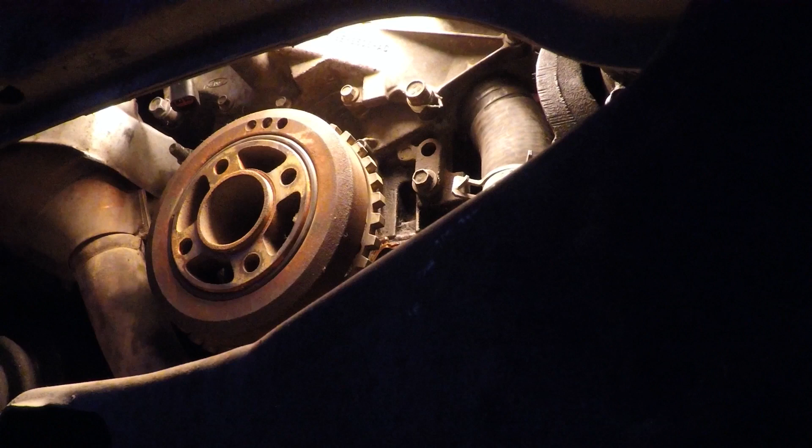Okay, so I put some of the thread locker on a bolt, and we'll put her back in. That is good for now. Now I gotta torque it down. But before we do that, I'm going to go ahead and get that crank position sensor.

The guy goes back in here. Okay, so that one sort of fits inside.

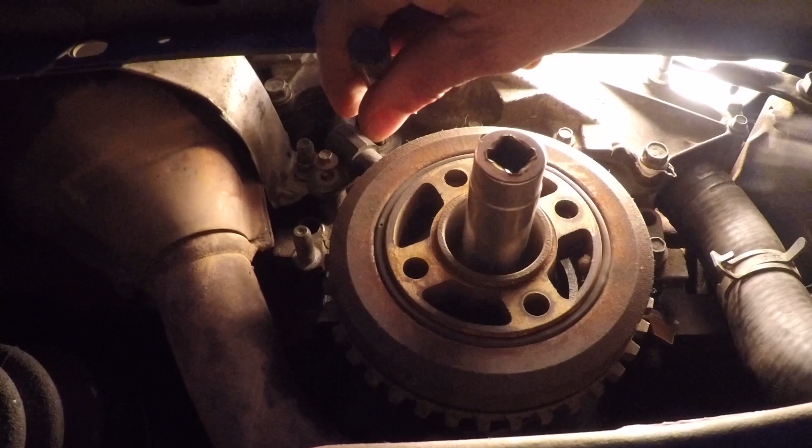Hammer chisel there, go ahead and take your little teeny hammer. Let's take this out of here.

Okay, something I should have done to the other one, but I didn't, was put some lube on it. Ow, come on you. Ooh, I had to put on a glove.

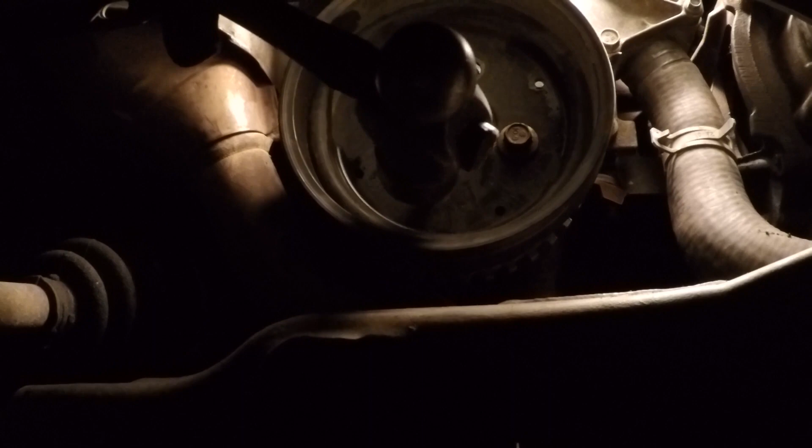Whew, it's a tough bolt. Yeah.

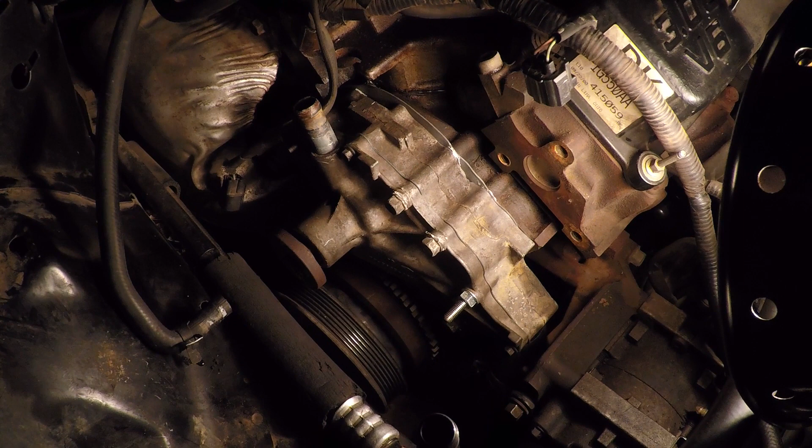Alright, well, we're back up here because this is where there's things left to do. Like plug in the sensor there, the crank position sensor. And we've got it running on the small stud there.

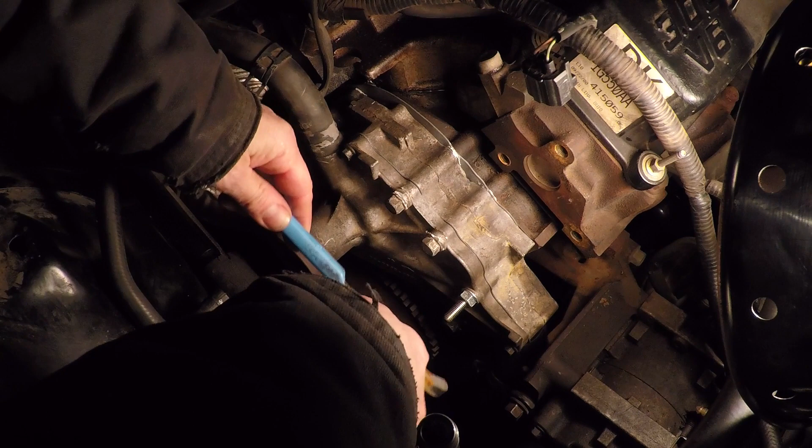I guess we could probably get this guy back in here. Gonna need pliers. And we can go ahead and get that one's in place.

I hope that's where it wants to go. I'm really not sure exactly. I think that's about right. Well, that's where it is now. I guess we ought to put it on a pulley.

Thread locker. Put some of that on there. And it comes with it, so you gotta use it right.

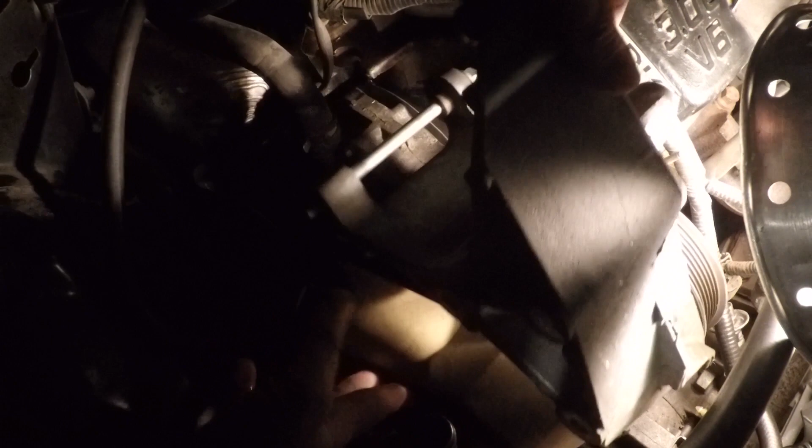Looks like I think I'm ready for the power steering assembly. Alrighty.

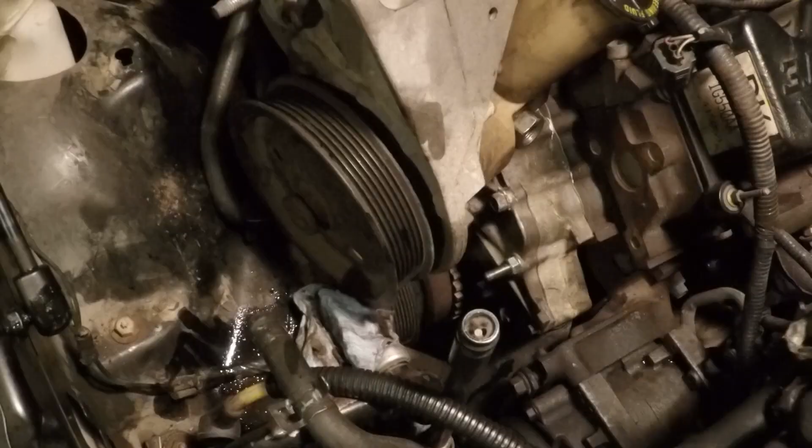Okay, that's good enough for now. Yep, that's my 18 millimeter, I believe. Because you gotta have an 18 millimeter open-end wrench for this.

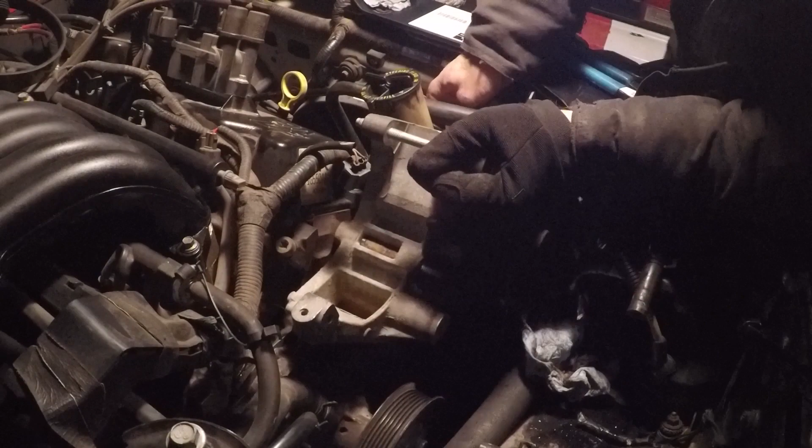Ay, why does this one have to be so difficult? I don't know if you can see, but over here. This off. Oh, I suppose I can put back there. And I can just.

That's good enough. Slide him back in there. Why that gotta be so difficult?

Yeah, that was a little bit messy and difficult, not sure why. Still don't even have it on. A little bit of used transmission fluid will help guide it on its way.

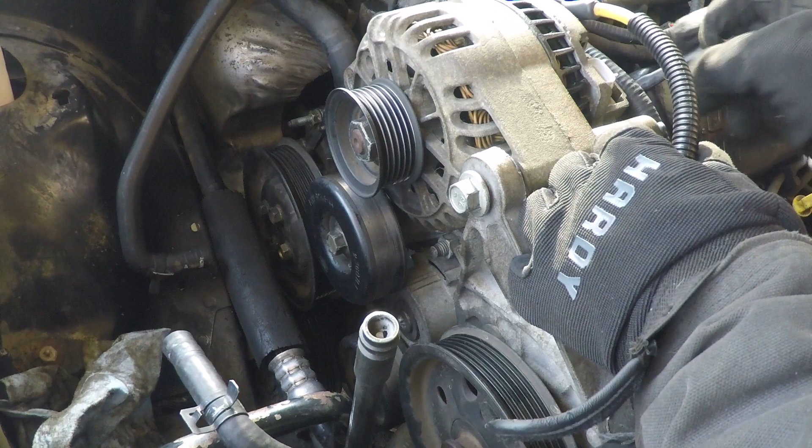Alrighty, so the fun begins today with undoing some of the stuff we did last time because I made mistakes with the camera. Oopers. So we'll have to undo some things. So undo those.

Tap this guy back a little bit, make it easy to put the part back in. Oh yeah, that was torqued down good. Maybe we can have some fun here. I gotta get this guy back in here, good, pry it off. There. Getting it.

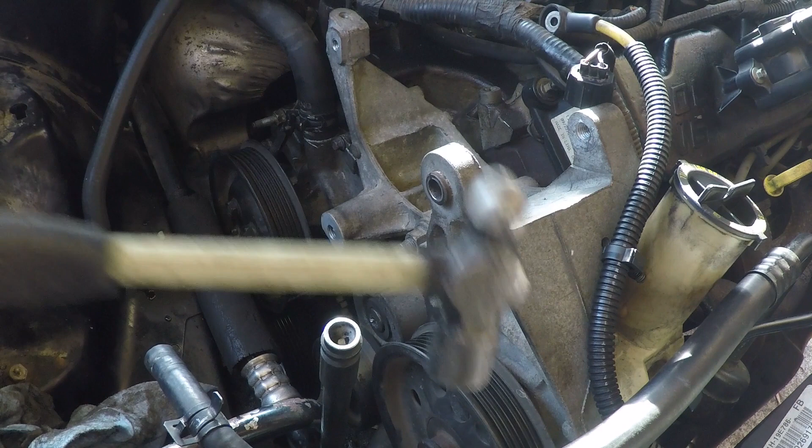Probably should set my trusty torque wrench. I got the new lightweight model torque wrench. Even though it's small, it does go up to the 40 pounds required for this bolt here. I think it's 40, I don't really know, but it should be just about 40.

There we go, that one's set. Now I gotta put this one on. Okay, I gotta start over with this pulley here. Put this guy under here, hold it in place. Okay.

Slide this guy in, and notice how easy it is to put this in place because I tapped this sleeve back just a little bit. There we go.

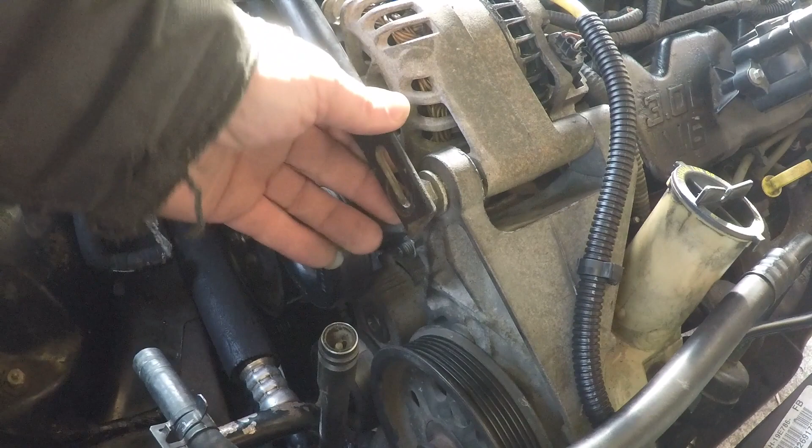Well, now I realize that bracket bolt's going to have to come back out for this. Get my pry bar. Might have to get in here. Get that bolt. Yeah.

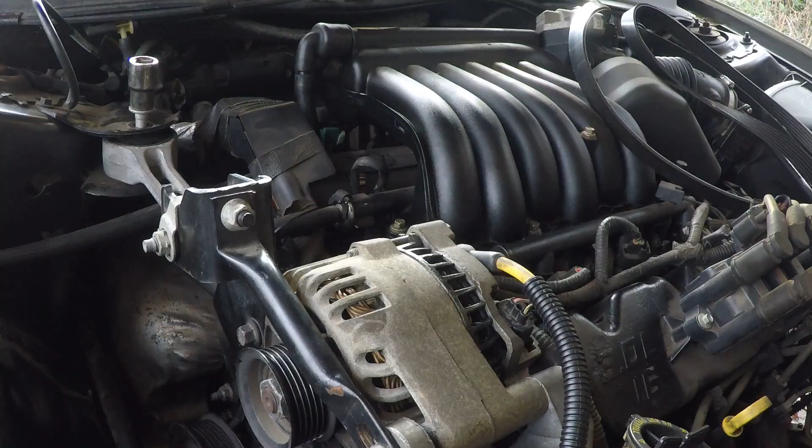Okay, so that's the last bolt. I'd loosen this one up. Now it's time to put that one in. So there we go.

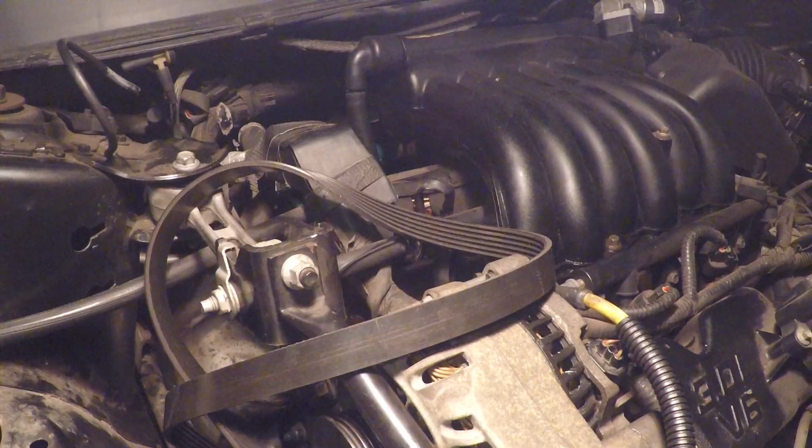Alrighty, so that's basically all we got to do. Let me put that right there so I can see it, because...

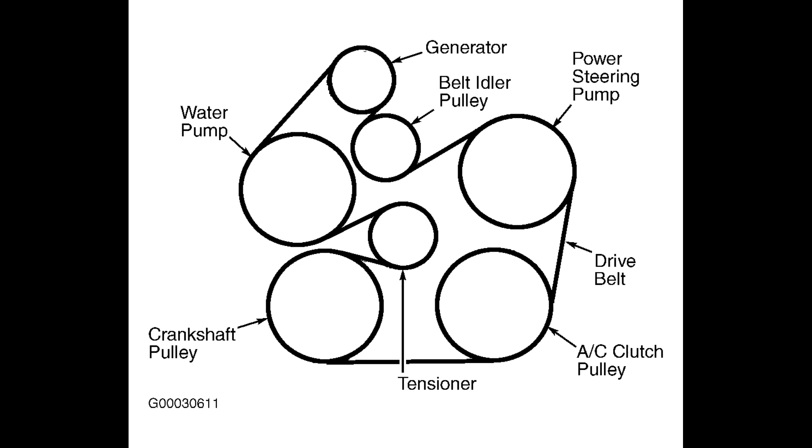There really is no good place to put the camera to do this. And I suppose there's no point. I suppose I could put the camera pointing at me so you can see me struggle. Are you a sadistic viewer? Do you want to watch me strain? Alright.

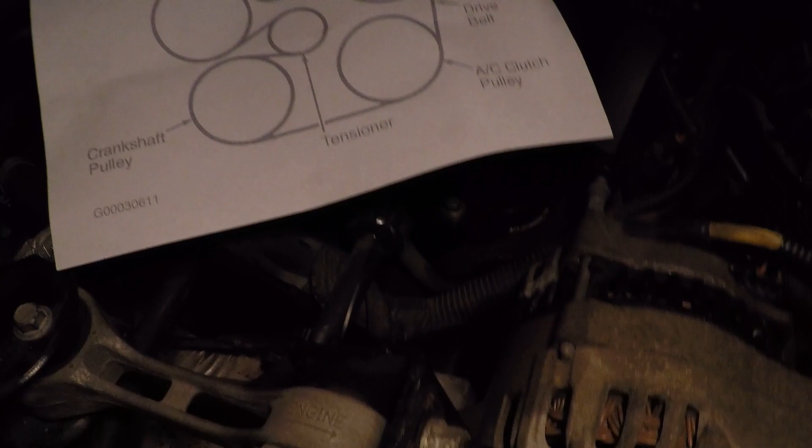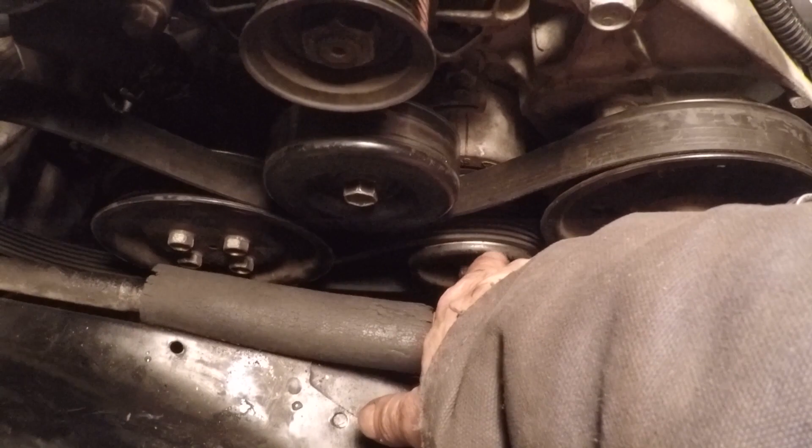Okay, so guess what I can do is show you how I've got the belt all sort of set up, the slack here, and it is routed down and around, and it's actually routed just like that along the bottom, up on the AC pulley on the crankshaft, and then from the crankshaft it goes along the tensioner and back under the water pump, and then under the... what's that pulley... and around the back of the power steering pump here.

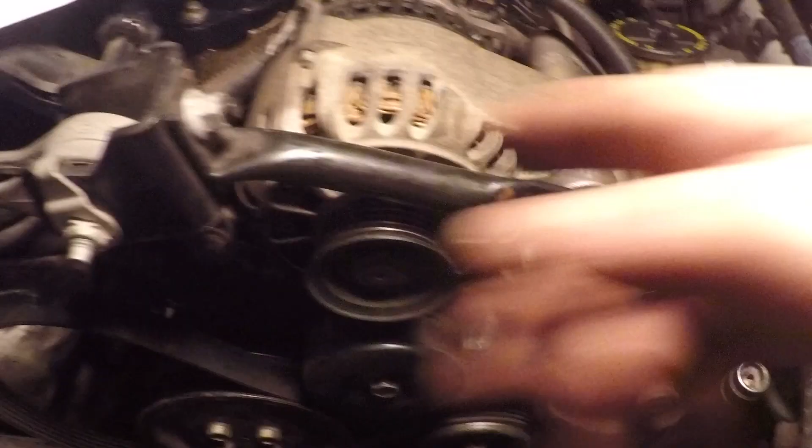So now I just got to get a 15mm in here and bring it this way. I believe that way will take the tension off. And while I bring that wrench that way, bring this up this way. Easy peasy, right?

Yeah, it does go this way. It seems to go the opposite direction.

Seems good, good all around. Looks like we're good. Alright, so now that the belt is under tension, I can actually finish up the torque on those bolts.

Alrighty, I think it's actually pretty much done. All I gotta do is put that tank back in. Wow, hard to believe, huh? Finally back together. Yeah, where's my tank?

Oops, what was that? What was that? Oh, there's the bolt I lost. Are you kidding me?

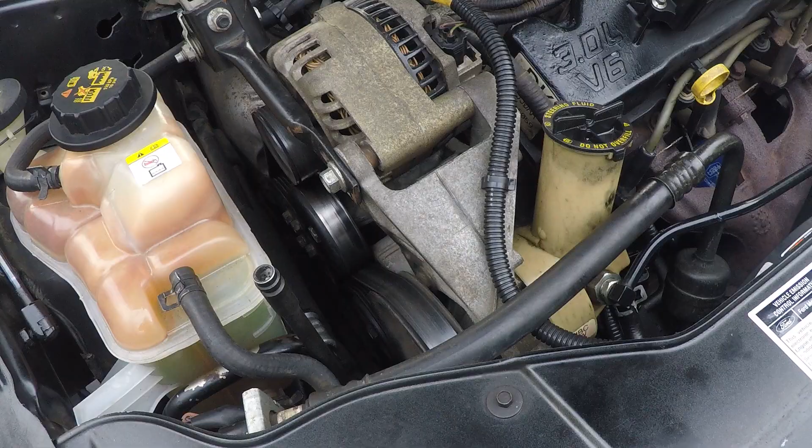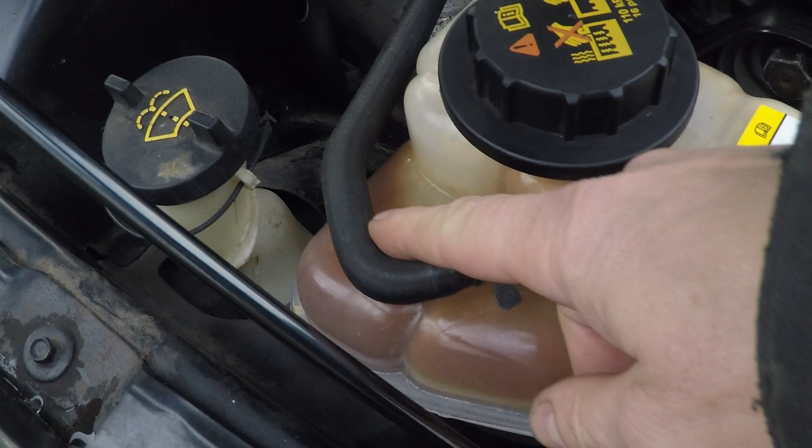Alrighty, well, I had some camera troubles, but I assure you I did get these hoses. And one down here, and this bolt in, and there's another one that goes over here, but I don't know where that is. But you know, it'll probably be okay. Don't tell anyone.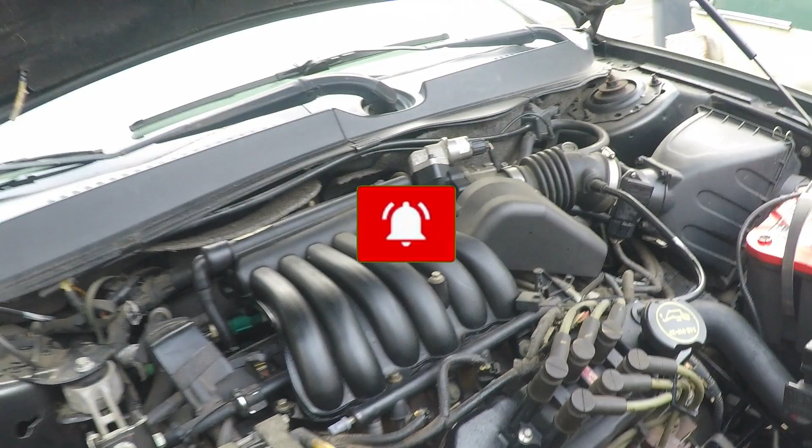So after I did that, I went ahead and opened this up, and I ran a hose in there, and I flushed all the fluids out of the motor. I ran the motor for a while, and I just ran water in it until it flushed out all the colored brown orangey kind of stuff like this here.

I don't know if you can see, it's sort of stained. This is actually a new tank I got like a year ago, when the other one deteriorated and leaked all underneath it. That's what this residue here is from, from when the coolant leaked under it, on the old tank.

So this tank is only a year old, but the rust that was in the coolant at the time pretty well stained the tank. So I probably should have flushed the system then. I didn't. I probably should have flushed the system 10 years ago and didn't.

At any rate, so this time, since I had already drained most of the fluid out, and what didn't leak out while it was leaking in the timing cover, I figured I'd just flush it all out and get only clean stuff in there.

And that meant just opening the valve down here that you have to open up toward the beginning when you're draining and cleaning fluids, and running the motor, having the hose run at a low pressure to keep the tank full while it flushes out the system. Then I stopped the water and left the engine running until it pumped out all the fluids it was going to pump out, and then I shut it off.

And you also want to turn the heater on, and want to get the engine up to temperature. So you may need to close off the water for a bit, get the engine up to temperature, close the valve off, and then let it all drain out while you have the heater on, because the heater will have a bunch of fluid in there too.

So you want to have the heater on. I went ahead and turned the fan on, although I don't know that it makes a difference. Whatever, just try to get all the coolant out.

Once all that was out, I closed up the valve down there, filled the engine up with coolant, and it takes a couple of gallons. So fill this up, start the motor running, fill this tank up, start the motor up, and then keep filling this up as it burps the air out.

And it may take a while. Move the car up and down on a hill at an angle to get all the air out of the system.

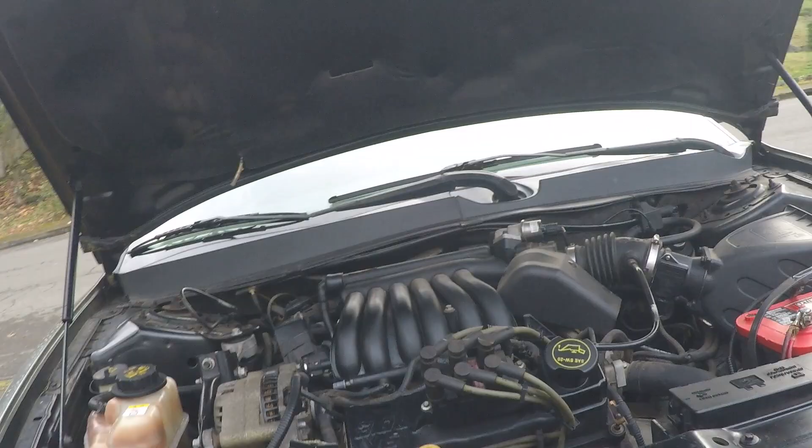And once all the air is out of the system, then you want to come down here and put these bolts that hold this guy in. There's a bunch of screws, 5.5 millimeters, like 8 of them, and 3 8mm screws. Put those in. That holds all that up there, and you're done.

It's all completed. And then you're like, oh yay, I can drive my car now. Yay, I'm happy. And then you get to be happy for a minute. So, yay, happy for a minute.